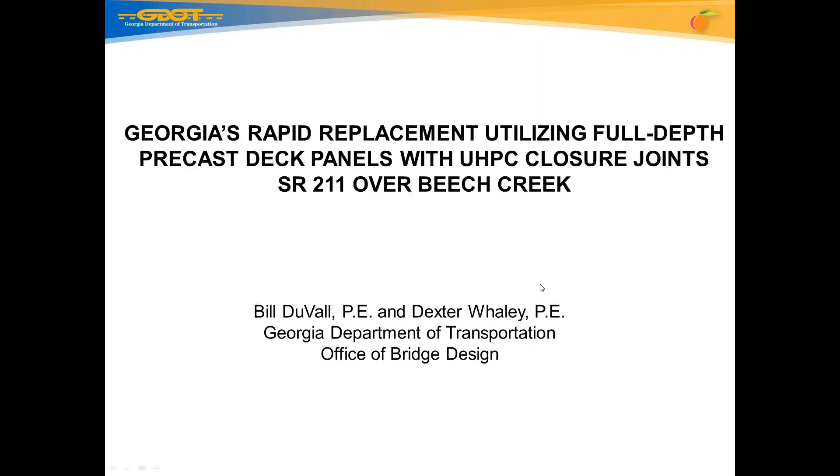But before I get too far into it, Georgia, I don't know if we want to say experimental in ABC, but we've done some ABC work over the years, and we certainly keep building a toolkit for ourselves and trying to just take these technologies and put them to use. Let's see, I want to make sure I'm on the right page here. So I'm going to talk a little bit about where we've been over the past few years, and then where we're going to go in the future.

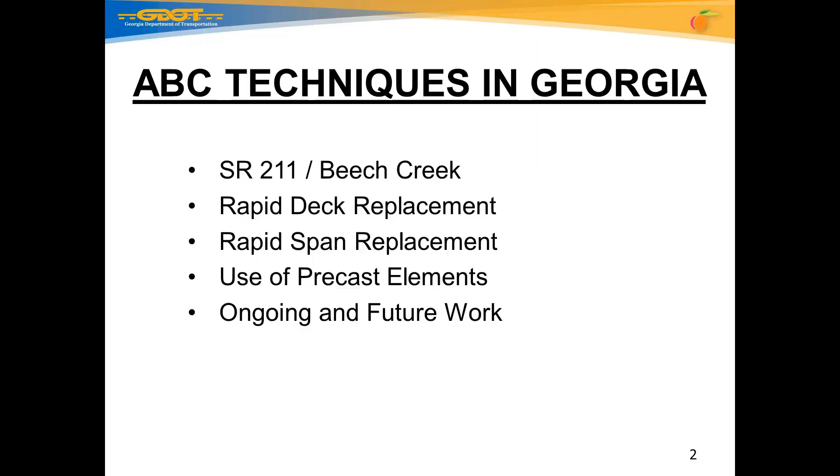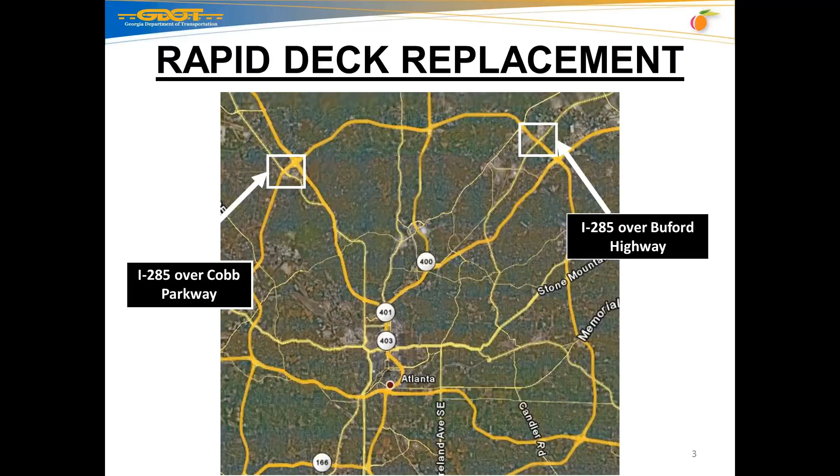I just wanted to point that out, that a contractor over a series of weekends would do lane closures, not shut 285 down. We kept traffic open. The contractor would go in and remove portions of the deck and use the exodermic deck. This is not uncommon - it's been used around the country, but this was our first use. We used it here, and since then we've used it in a few other places around the state as well. But that really proved that doing accelerated construction with the traffic could be a real benefit to the state.

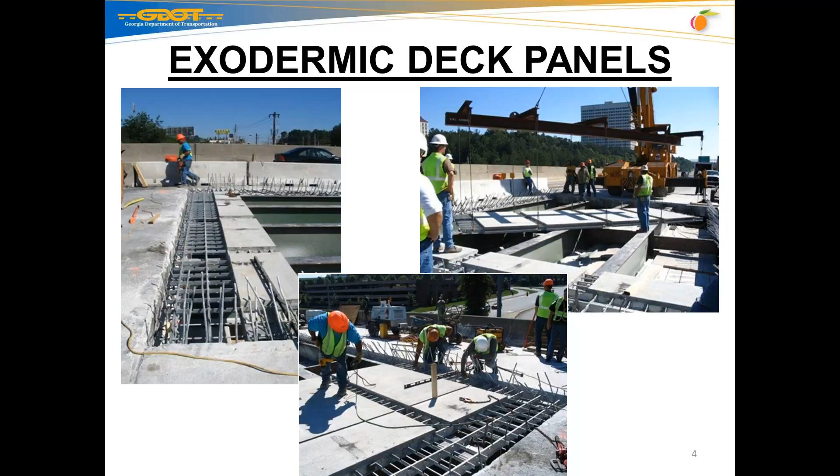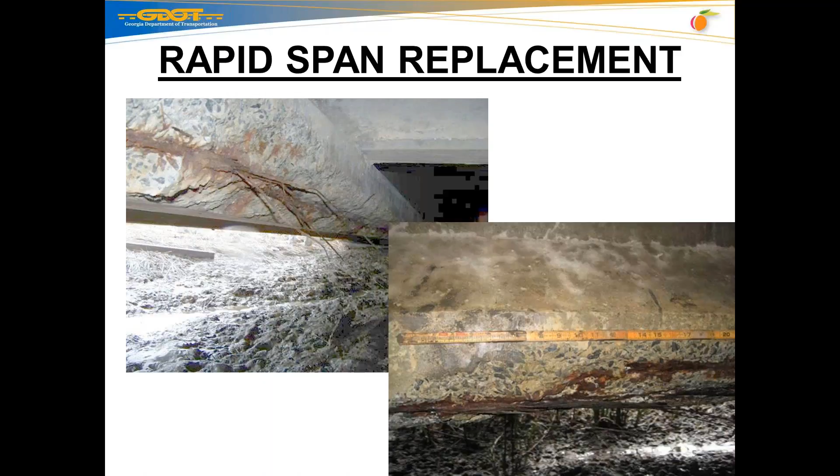Another one I'd like to mention, we had a project, a bridge down in our coastal Georgia that had pre-stressed beams that was inundated by the tides, and eventually, as you can see, we had some pre-stressed beams where we had some corrosion. The pre-stressing strand was totally corroded away, and we had to go in on another maintenance project, and the engineer that took on this project came up with, I will call it, a decked AASHTO beam type design.

They were able to prefabricate these - these are Type 2 beams. We shallowed them up from the original beam so that we could get more clearance over the tides, and we're able to only shut the road down for 2 weeks, and that was a big deal for us. So a good opportunity, and certainly we want to try to take this technology and use it, move it forward. This project was done back in 2013, I believe.

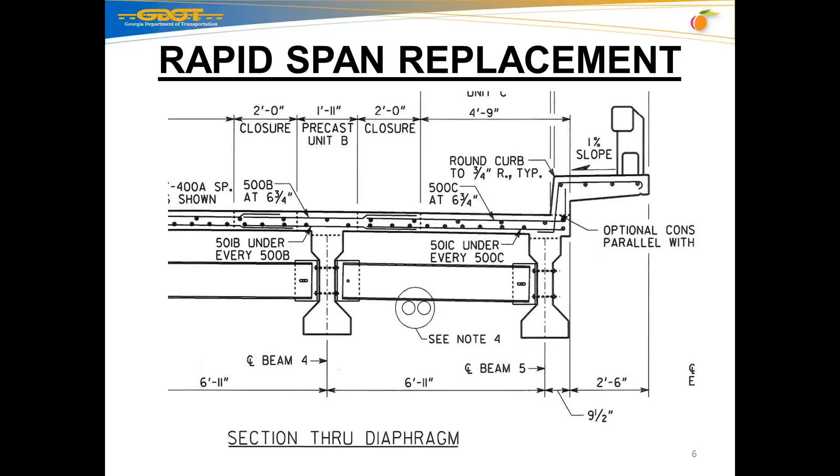Another project we did a number of years ago, we had an interchange that was built south of Atlanta toward our Columbus area. It's about, I don't know, maybe 60 miles southwest of Atlanta, where Kia was building a manufacturing plant. We needed a new interchange, and as part of the construction, we decided to use - it was a design-build contract - we decided to require the

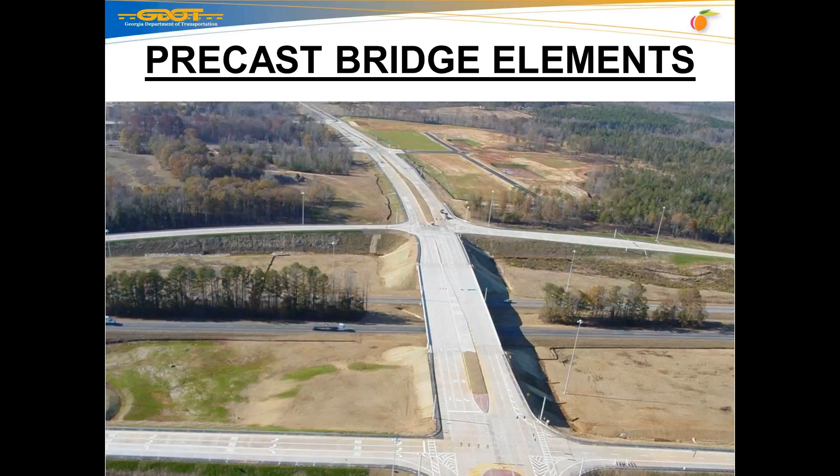contractor to use precast columns and precast caps. One reason is to minimize the disruption in traffic, but two, to really put this technology to use in Georgia and find out how well it worked.

The contractor was C.W. Matthews, and the designer was Arcadis, and they completed this work back in 2009. I will say that this is also a project that is featured on the ABC UTC database, so if anybody wants more details, it's already available.

Deficient bridge. There's truck stops on both sides of the highway. It's a big connector, we have a lot of traffic on there, so we decided we wanted to do this bridge rapid replacement. We let a design build contract and gave the option: we told the contractor they had to either do a lateral slide or use SPMTs. The contractor is Wright Brothers, and their engineer is WSP Parsons Brinckerhoff, and they chose the SPMT option.

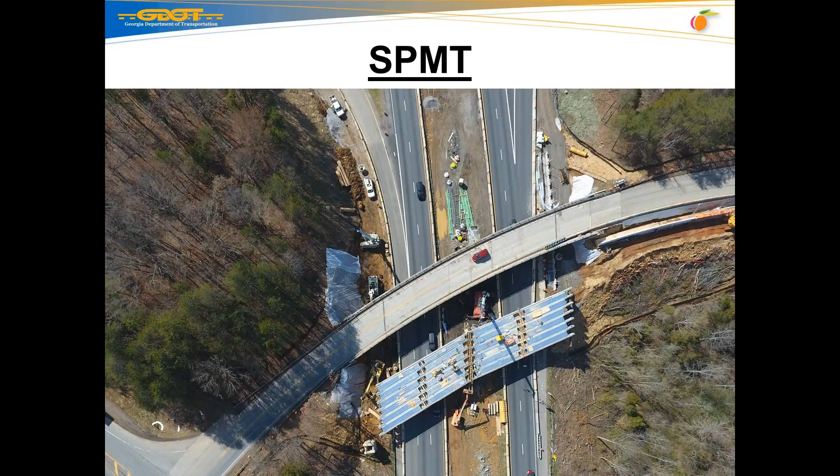But Dexter's going to go ahead and talk about State Route 211. Now, when we're done with this, we are going to have our details, and we're going to push these out on the ABC UTC site as well.

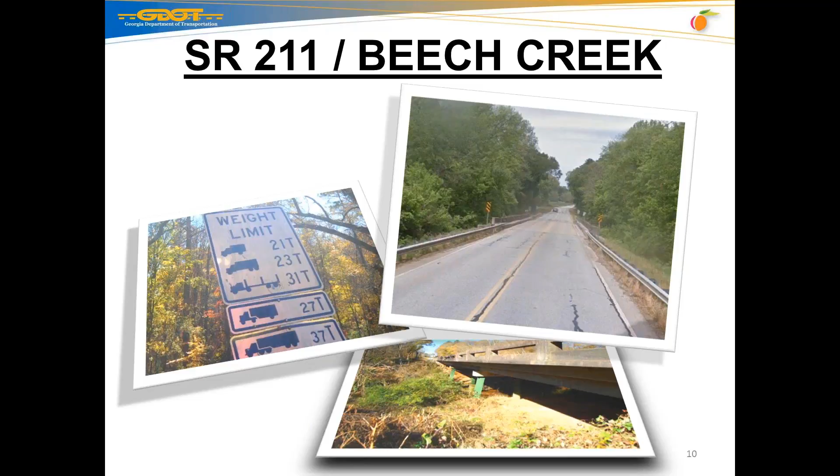Project was State Route 211 over Beech Creek, about 50 miles or so northeast of Atlanta. The reason this bridge needed to be replaced was that it's posted, and the deficiency rating on this was below 50, so the bridge needed to be replaced.

Quick overview of the project: it's a single span bridge, 148 feet long, with a gutter-to-gutter width of 40 feet. We're going to use full-depth precast deck panels on this bridge using UHPC for the joint connections. We had allowed a 60-day road closure for this bridge.

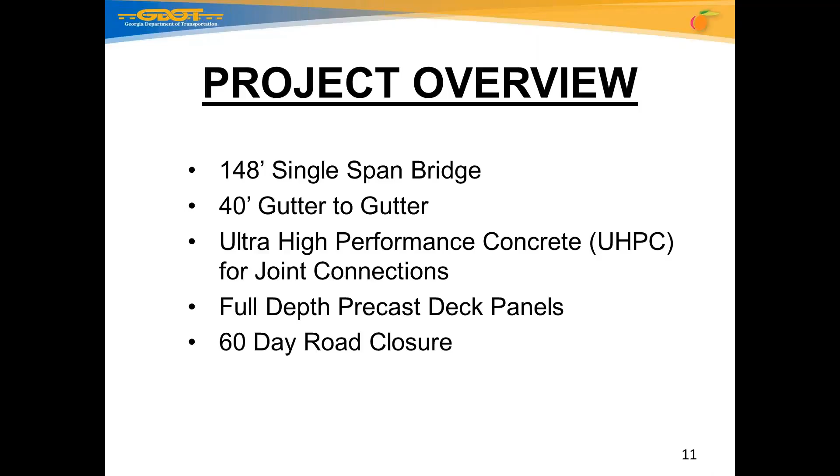Starting out, the road was closed for 60 days starting June 1st, but they were able to go in and clear and grub the right-of-way and put in a temporary work bridge before the actual closure. Once they closed the bridge, it took about 4 days to demolish it and get it ready. Whenever I reference a day for this contractor, a day was typically 8 to 10 hours - it was not a 24/7 type deal, they were basically working a normal 8 to 10 hour day.

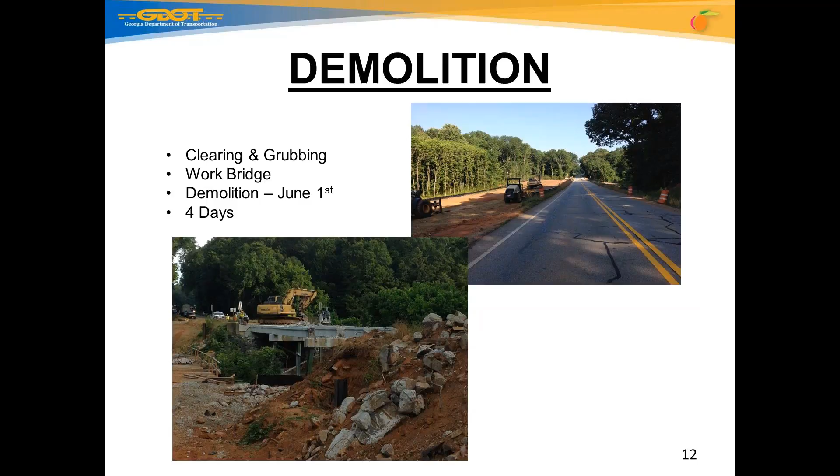For our abutments, we just used regular HP piles, and we allowed them to cast in place the end caps and the wing walls using 3,500 PSI 24-hour accelerated concrete. Again, because they were using normal crews and not really an accelerated schedule, it took about 7 days to form up both end bents and cast them in place.

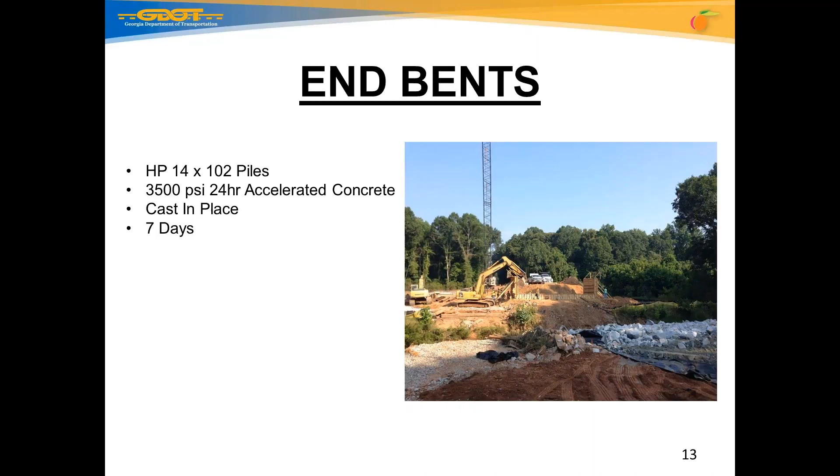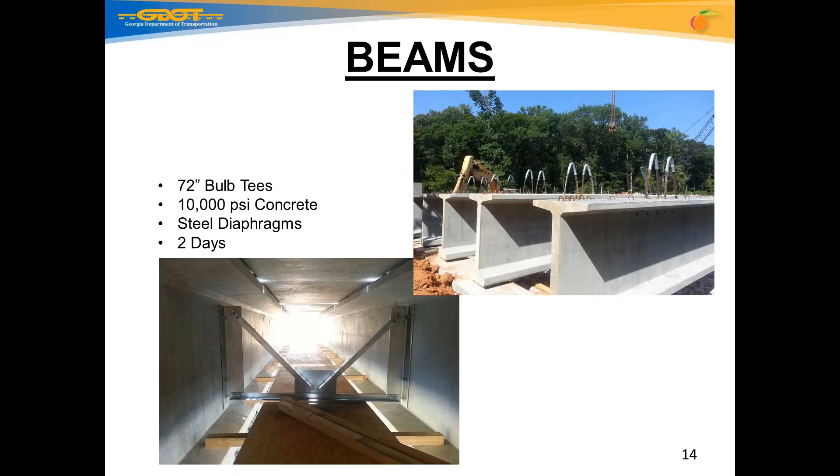We used 72-inch bulb tee beams for this bridge. The beams were approximately 10,000 PSI strength, and one thing the contractor really liked - we allowed them to use steel diaphragms. It took a day to set the beams and a day to put the steel diaphragms in, and that was a big positive. They really liked the use of steel diaphragms for this type of application.

Now, we used full depth precast panels. Our panels were 8 3/4 inches deep, which allowed us our normal 2.5 or 2 3/4 inches of clearance on rebar cover, but also gave an additional 1/4 inch to grind for any unevenness in the panels as they were laid.

We used number 5 bars across for both our longitudinal and transverse steel, and the panels themselves were 4,500 PSI concrete. We had 2 different size panels on the bridge - they were 8 or 9 feet depending on location, and about 21.5 feet long.

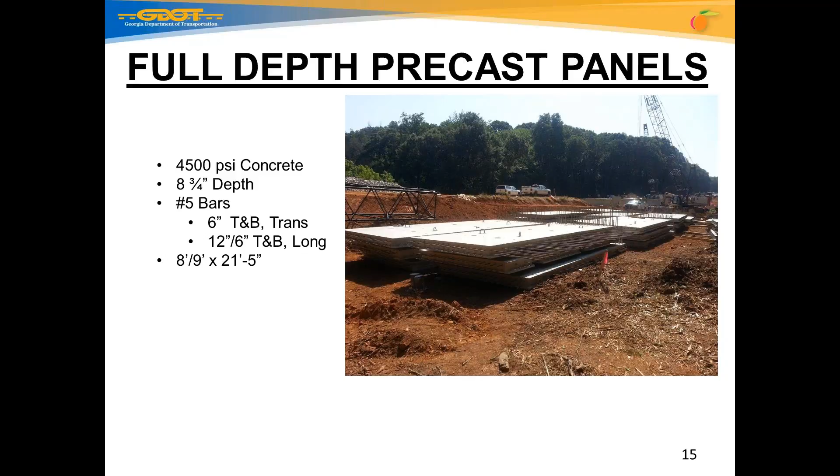So the question is, why do we use UHPC? UHPC gives us shorter development lengths, we can have tighter joints, and it's a very strong material.

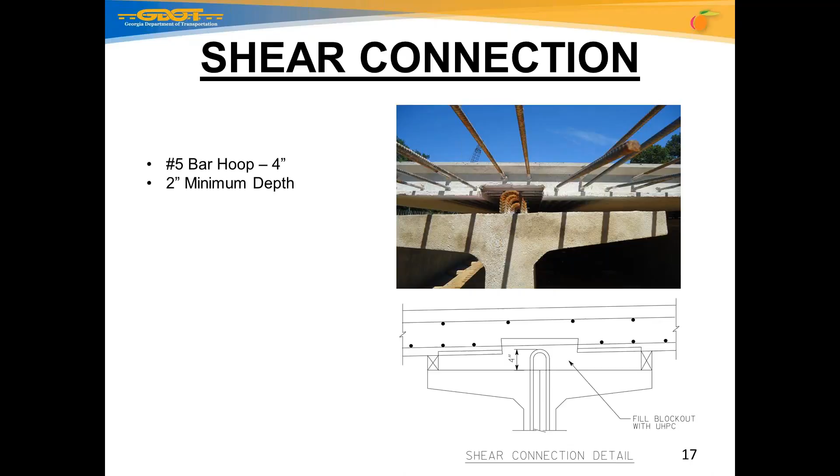Here's our shear connection where we were connecting the beam to the bottom of the panel. With the bulb tee, it's a 3.5 foot wide top flange, and the whole area was filled with UHPC. We wanted a minimum of 4 inches of our beam stirrups to protrude into that UHPC, and we had a minimum requirement of 2 inches depth on the low side of the slope.

Here we're setting panels. It took us 2 days to set the panels. We had 32 panels that needed to be set, and we were able to set 16 one day and 16 the next.

As you can see on the panels here, they brought them in and set them in place. In the picture there's lifting loops designed by the engineer, and you'll see these bolts again - these are adjustment bolts. This allowed us to basically preset the slope of the beam, so when they went in, they could just set the panel in place, adjust the bolts, and that would set our 2% cross slope.

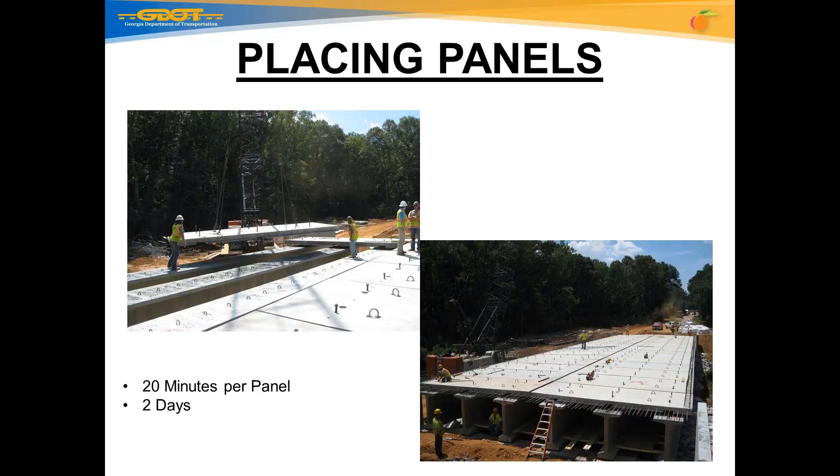The various holes you see in the top of the bridge panel there between the bolts were supposed to be pour holes and vent holes. This will allow you to add additional UHPC or let air out - that was the function of those holes.

The UHPC that we used, we had 2 mixing plants on site. This allowed us to have a continuous pour with a batch being made every 15 minutes. Once we started pouring, we could pour one side of the bridge, and it was probably a 12-hour day on the pours.

Being that this was the first time the contractor used it, we were all in a learning phase here - what was the best way to move the UHPC from the ground to the bridge? Lafarge Concrete was the supplier of the UHPC, and we had their mixers and their personnel on site to do all the QC testing.

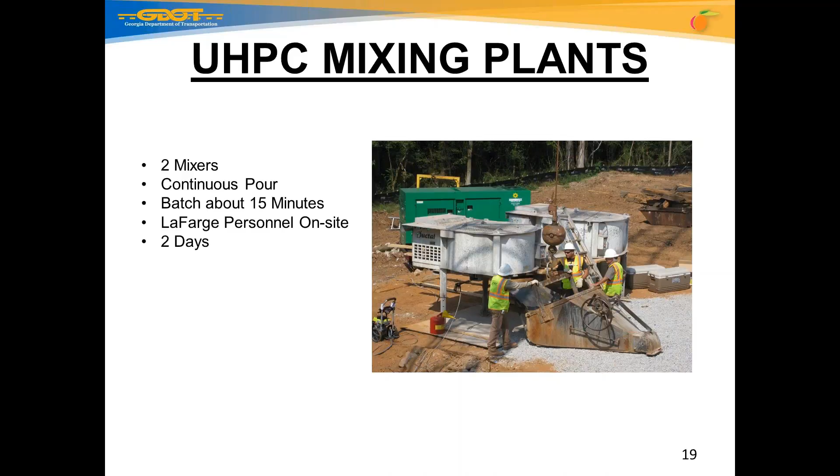This is a closer picture of the mix going in. The UHPC consisted of a bag of cement, a 2,200 pound bag. It's their Ductal product with steel fiber bags, and you should be wearing some type of safety gear when using this, particularly respirators, gloves, and Tyvek suits.

Being we were pouring this in July, it was 95 degrees the first day, so it was pretty hot. Some of the guys didn't want to wear the Tyvek suits, but it is advised to use that because it does go everywhere.

One of the other components is the amount of water you put into UHPC. The UHPC is very sensitive to your water, so you have to weigh out your water and your plasticizer, which gives you the strength with the UHPC.

The water here, we were putting in a mixture of water and ice of about 130 pounds. Because of the temperature outside that day, we were putting about 80 to 90% ice into the mix so that the mix wouldn't get too hot while they were mixing in the mixers.

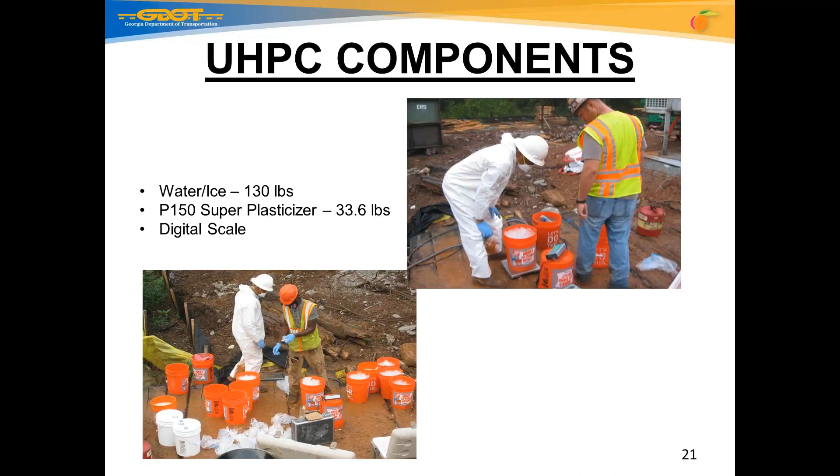We had a digital scale at the site, and it's very important because you have to weigh everything out - you need a backup scale, because a $50 scale could stop the whole project if you couldn't weigh it out.

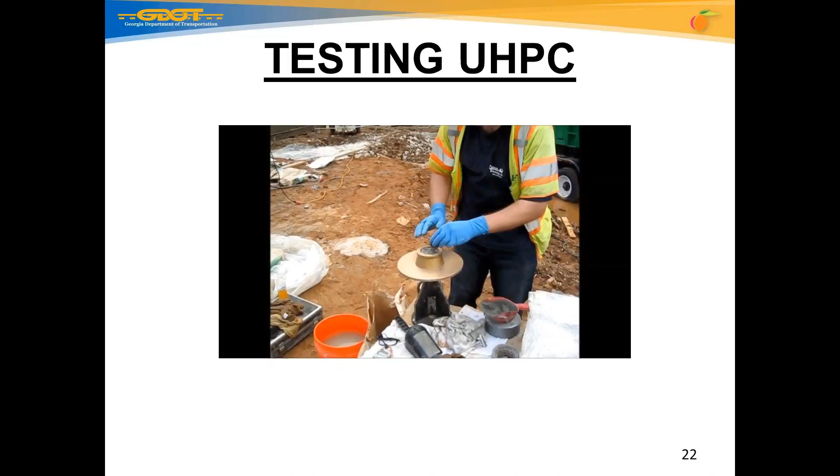Here's a little quick video on how they actually test the mix. It's sped up a little bit, but he does a 3-inch slump here and takes the temperature of the mix. For every batch that comes out, he'll take the temperature and run a slump test on it. It takes probably a couple minutes to do the actual test.

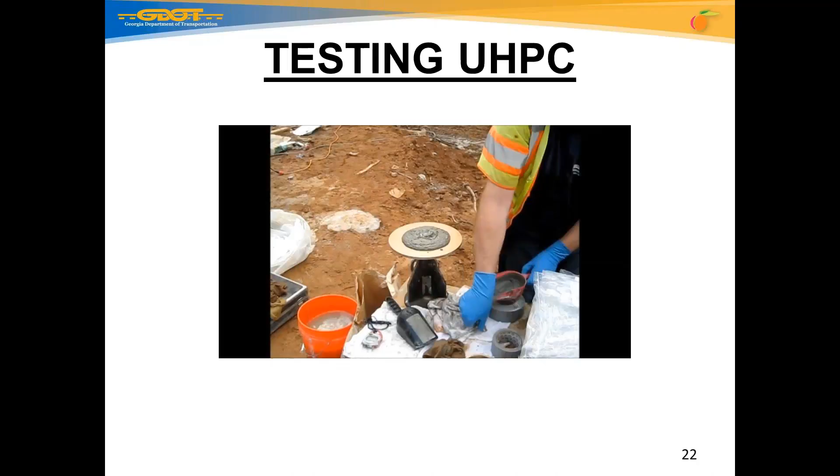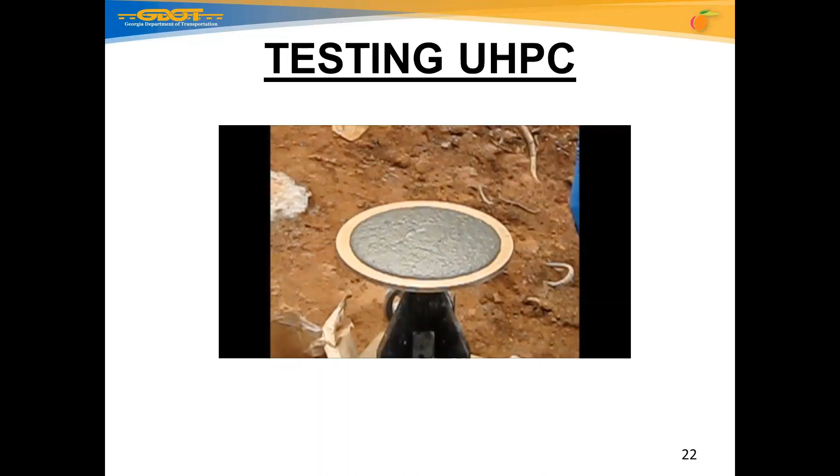The initial slump here we're looking for is between 8 and 9 inches. He'll sit here and time it, then come back with this little device, turn it 25 times, bounce it, and remeasure it again. So right now he's taking an initial reading, and now he's bouncing the UHPC - we're trying to keep it between 9 and 10 inches. If it runs off that dish, it's a bad batch.

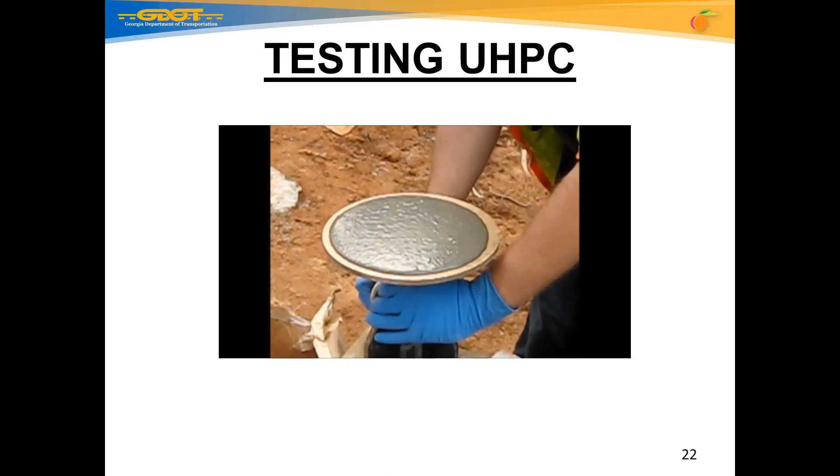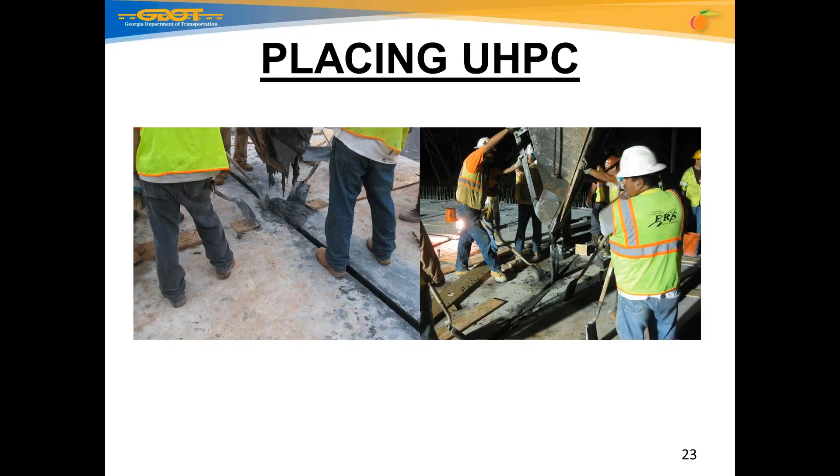In order to ensure that all your joints and hidden pockets are full, you need to maintain your head pressure. One way is to take a 5-gallon bucket and create a chimney, attach it above an open joint, and keep that bucket full with UHPC, and it'll keep running until it has nowhere else to go. You need to make sure your joints are covered, because if you don't, the UHPC will continue to flow and push out any open joints.

The way we could tell once a joint was completely full was the bucket actually started filling back up with UHPC. So we would remove the bucket, close up that hole, and proceed down to the next joint.

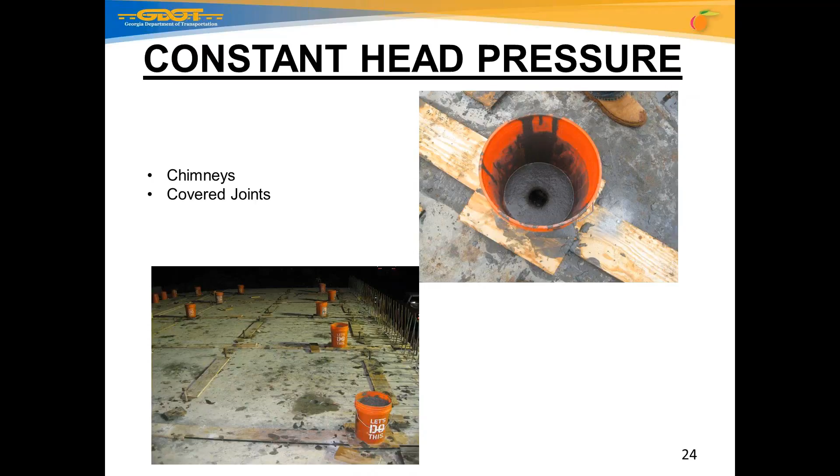One of the things that took us the longest was putting up the formwork to contain the UHPC. We had suggested using stiff styrofoam to form up between the top of the flange and the bottom of the panel, but the contractor was worried it may blow out, so he decided to use wood, and it took 8 days to install and remove the wood forming. That was one of the largest consumptions of our time frame. They were using 2x6s and 2x4s.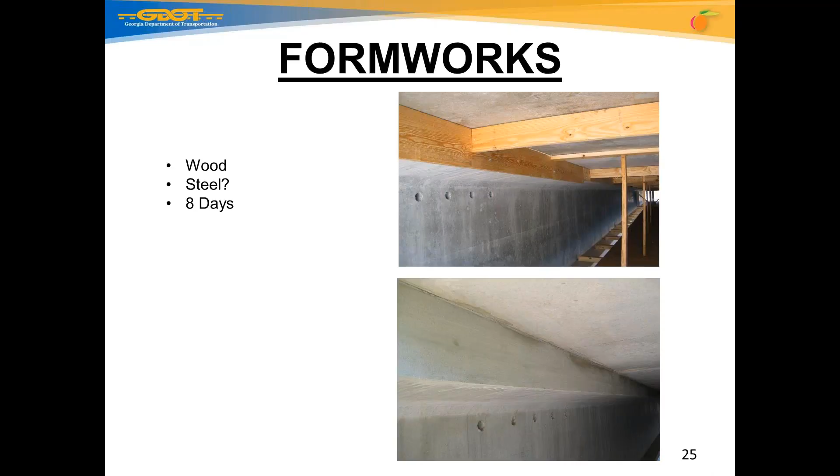They removed the side form and finished it, and it looks really nice once finished. They did contemplate maybe next time using steel, but we still haven't figured out exactly how they would go about using steel — that's something for us to think about for our next projects.

The end walls are typically just normal cast-in-place end walls. Again, we allow them to use a 24-hour accelerated concrete. Doing the process of the end walls, removing the formwork, placing the backfill, placing the approach slabs, and doing the barriers on the bridge took about 9 days.

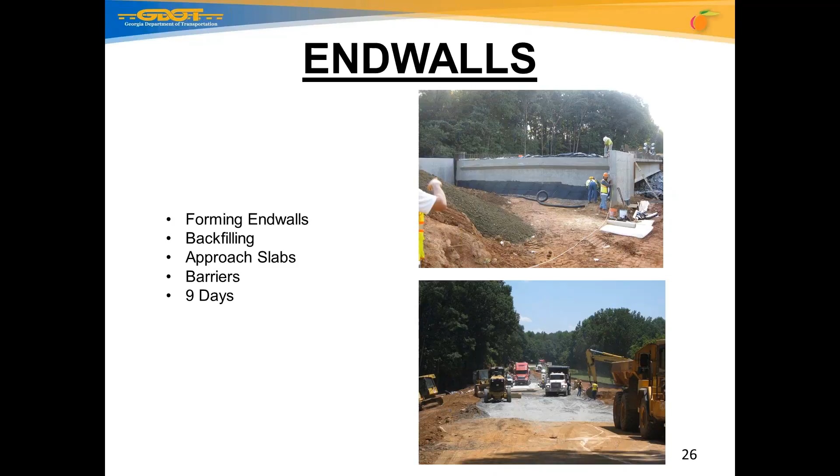Then the finishing touches on the bridge: we had to do our approach paving, grooved the bridge, did the final grading for the dry soils on either side of the bridge, and then they striped the bridge for traffic. This took about 3 days.

So when all said and done, we had this bridge open up in 59 days, which was probably one of the quickest bridges we've ever done in Georgia. That was a complete bridge, not any type of maintenance. So from start to finish, it was 59 days from the date of road closure.

This is 59 days from the day we closed the road to the day we opened it up to traffic, but actually it was only probably about 42 days of actual bridge work. We had some other work on the other end — there was a retaining wall that added a few days. Overall, the 59 days included the road closure, no Sunday work, some Saturdays worked, and a holiday in there. So when you take all those extra days out, it ended up being 40, 41, 42 days.

Now I'm going to turn it back over to Bill, and he can go over the lessons learned.

Well, I think one of the biggest things we got out of it was that Dexter was involved with the construction throughout. Not only did he design it and get the shop drawings approved, but I wanted him out in the field during all this construction so we could handle what was going on, but also learn from it so we can move forward. One of the things we saw out there was the leveling bolts.

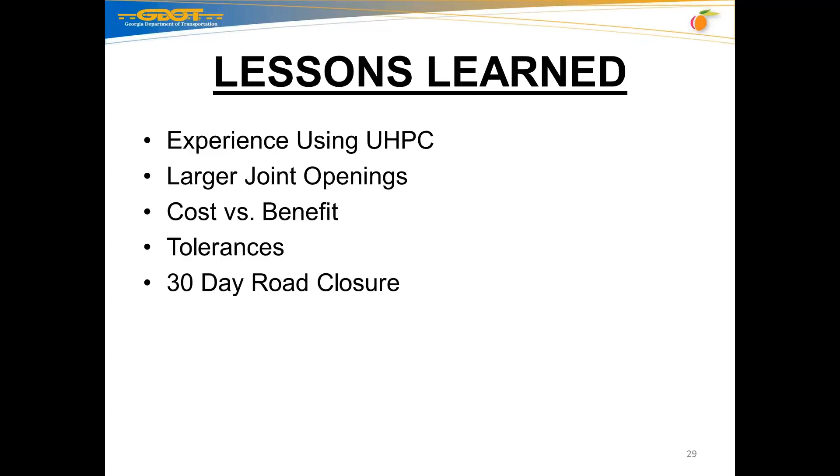Just wanted to put this out there: we let this in July of '15, but the work didn't start. The bridge closure was a year later, June 1st of '16, when we got to that point. We couldn't have started anyway when we let it in July, because we had all the shop drawings and coordination ahead of time. So that was not bad, and we wanted to do it in the summer anyway — that was the time period we were allowed to close the roadway.

The contractor is local contractor E.R. Snell, and E.R. Snell had Structural Engineering Solutions helping them with their construction engineering. They worked real closely with us throughout the project, and they really did a good job. Just wanted to tell who they are.

I also want to take a minute to give thanks to Dr. Kahn from Georgia Tech, who has done a lot of research with us on our UHPC, and helped us with advice based on his overall experience, as well as Dr. Ben Graybeal, who took some time to answer questions and give us pointers that ended up paying off in this project. We really appreciate the help from both of them.

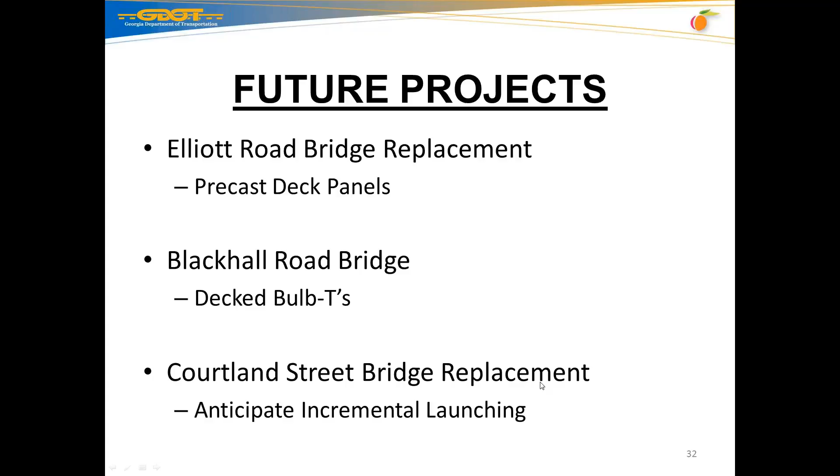So do you all typically use overlays or allow asphalt on your bridge decks, and what was done on this job for the final riding surface? We don't—we've gotten away from using overlays as much as possible. We've got criteria where we try to eliminate them; we've had a lot of bridges with asphalt overlays and tried to eliminate that over time. In this case, we decided we didn't want to do an overlay. We considered a two-part polymer overlay, but we really wanted to see how the ride was going to turn out and how the joints were going to look. Dexter and I actually went back out there last week—the picture on the right is the one we took the other day.

But the joints look great. As far as the way the UHPC bonded to the precast panels, somebody asked if we saw any reflective cracking through it or any leakage. Absolutely not. I'm 100% sold on UHPC. The joints look great. I like the way Dexter had the picture from underneath where you could see the bottom of the deck panels and the haunch board. It worked out really well. Looks good.

No, and when they ground it, we had a grinder on it. He had to make two complete passes. It took him a day, I guess, to grind the whole thing. He had to do a whole pass, about an eighth of an inch, then come back and do another complete pass. And it rides really well. That's great.

And then you answered that following question: was grinding done? Were there any difficulties with the grinding, with having the UHPC on the deck? We were out there watching him, actually out there with him grinding, and I didn't see any real problem. Logistically at that point we didn't have the approach pavement out there, so the contractor had to put some timbers out there for the grinder to drive off on. That was really the only issue.

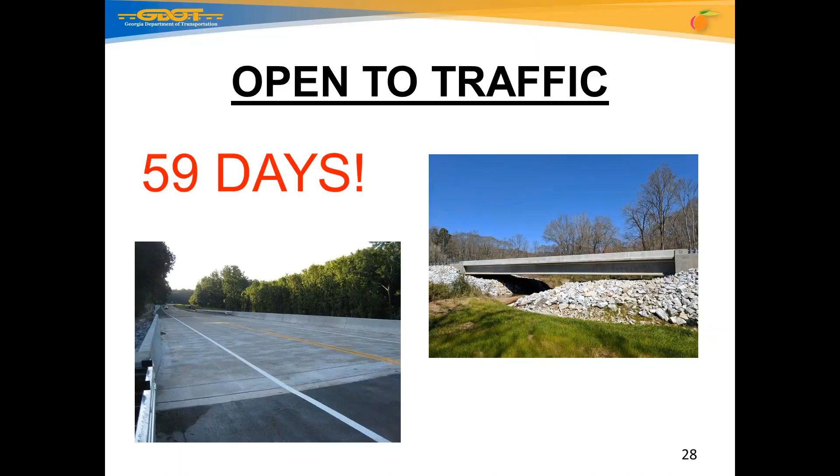Did the contractor like having those tabs at the bottom to help, or would they have preferred to see that open joint where they have to come back and form it? Or did you get any feedback on that?

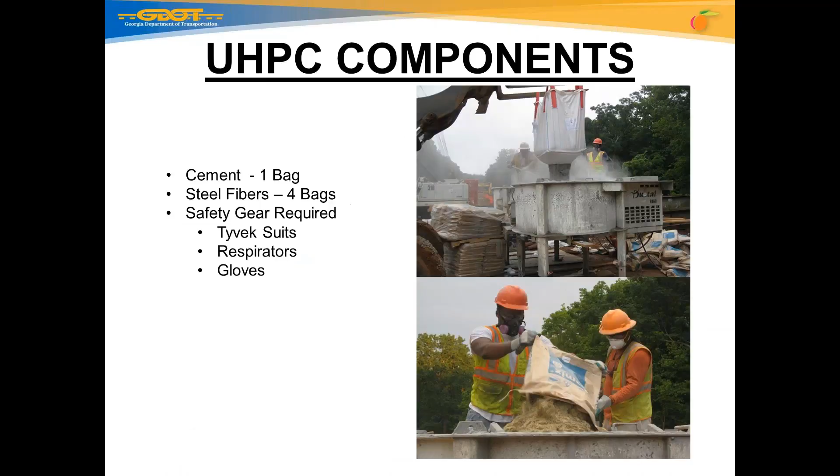They liked the bottom tab, but the top tab, for that 2-inch joint opening, made it a little harder for them to pour in there. So they were fine with the bottom tab because it helped keep it sealed without worrying about leakage from the grout. But with the top tabs, we're going to basically remove those, so you just have a 6-inch opening for the lap of the rebar, which will allow them to pour it real easy.

When we were pouring the transverse joints, it was kind of slow because they had to be a little precise about pouring it in. But when we poured our longitudinal joint with a 6-inch opening on top, that poured real quickly, and they were done with it pretty fast. So they like having an open top, but on the bottom they want that ear, that tab, to stay there.

Okay, so what about the quality assurance requirements? How was that handled with the UHPC from the owner's perspective?

Well, the Lafarge technicians were on site. There were 2 technicians on site making sure the mix was mixed properly according to the ratios, as well as the materials themselves coming from plants that Lafarge had, controlling the product. The product came from 3 different places. So the question earlier was about availability or logistics of it, it does take some planning to get all your materials out to the job site.

Now, if you're doing a project in the summer in Georgia, you're going to want to do things like work at night, like was done in this project, or potentially use ice in the mix instead of water in order to keep your mix cooler by the time you'll be placing it.

Okay, and this one was placed at night, correct? Well, the first day we were going to pour, we actually ran into a little hiccup because we weren't quite ready — they didn't have the chimneys or all the formwork to cover the open joints on top. So we waited till the next day, and plus, by the time we were getting ready to pour it was about 11 o'clock, and that day was already up to about 90 degrees at midday. So the second day we did pour in the day, but again it was 95 degrees, so the decision was made to do the second half of the bridge at night, and that was much better. It was still in the 80s in the evening, low 80s, high 70s, but it was much better, and the UHPC flowed much better.

During the day we were having to put about 80 to 90% ice out of the 130 pounds or so of water, whereas at night we were probably putting about 60 to 70% ice. So it made a difference.

Okay, and what was the strength gain on your UHPC, or what was it spec'd at? Well, the minimum spec was 21,000 PSI, but the 14-day break came back at 24. I think we had a 22, a 24, and a 25 break.